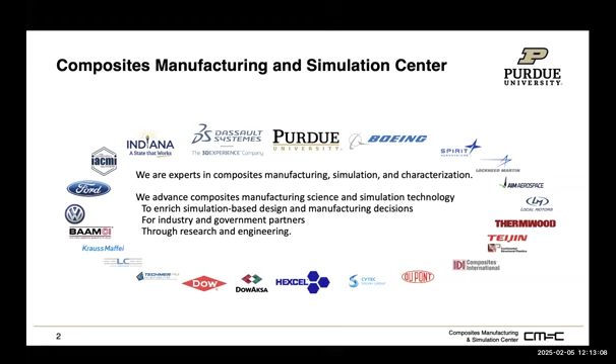Before I start, I also want to give a brief introduction to our Composites Manufacturing Simulation Center. I'm employed by Aerospace at Purdue, but also affiliated with the Composites Manufacturing Simulation Center. The center was established around 2016 with support from IACMI, to develop industrial collaboration with supply chains and OEMs to advance manufacturing simulation for composites.

Over the years, we've developed partnerships with a variety of different industry companies, including Dassault Systèmes through their 3D Experience Education Center of Excellence in Advanced Composites. We leverage the advantage of getting full access to the software, and we also have a partnership with Thermwood to develop larger scale additive manufacturing.

So you can see the movie at the corner. That's not really 100% my research, but we share the facility and develop lots of interesting collaboration work over the years, working on high rate composite manufacturing and practicing model-based engineering.

We also have a very interesting platform. As you can see in the middle photo with the cloud, that's the cdmHUB - a cloud-based infrastructure allowing researchers and educators to share teaching resources, research resources, and most importantly, simulation codes for the entire community.

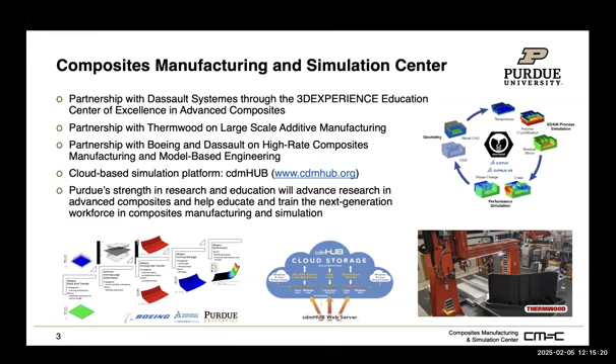If you are doing nano research, you're probably familiar with the nanoHUB. The CDM Hub is particular for composite manufacturing simulation. If you'd like to know more about composites or get more teaching resources, you can go to the CDM Hub. The goal is you can publish your codes, and people can run them on the cloud without installing locally. There are lots of interesting resources on the CDM Hub if you're interested.

With the center focusing on composites manufacturing, we also have a variety of facilities available to support it, including the autoclave, the press for compression molding, machines for materials characterization and mechanical testing, and a laser scanner to measure part dimensions after the manufacturing cycle. You'll see some applications of this equipment supporting simulation work.

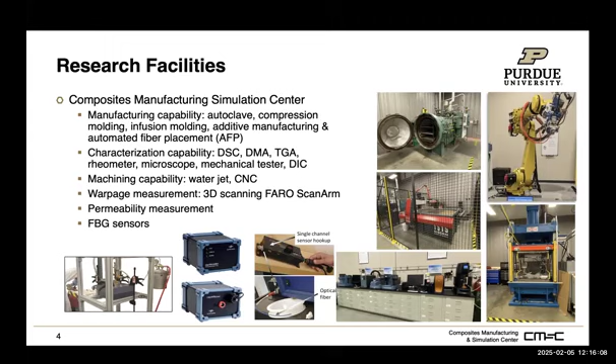Since most of you probably aren't familiar with composites, you've probably heard the name - this is a material widely used in aerospace structures because of the weight savings they provide. The general idea behind composites is combining multiple materials to maximize the benefits of each.

The composites I've been working on are a combination of reinforcement and binding. In particular, most of my research nowadays uses carbon fibers because they're very strong and stiff. But one drawback of simply using carbon fibers - and carbon fibers have never been a structural material by itself - is that it's very brittle, and also difficult to handle because it's like hair, very small.

So to make it a structural component, you also need a binding polymer, which we call resin, to bind the reinforcement. With this, we hope to get one integrated part with the stiffness and strength we want, and also better damage tolerance, because the resin system has larger strain to failure, so it's more ductile. Mainly we want to add ductility to the carbon fiber reinforcement to create a composite.

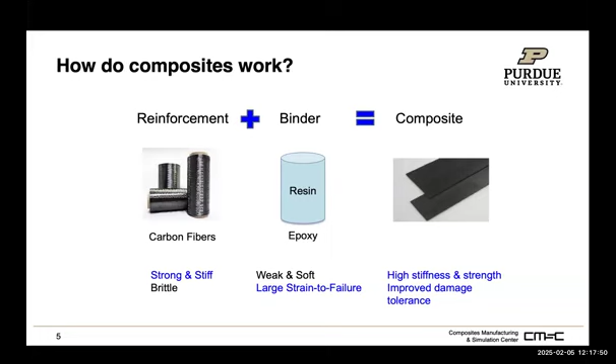There are a variety of manufacturing processes to make composite parts. We'll start with liquid composite molding, since this is the process I've focused on for a while. Later in this talk, you'll also see advanced automated fiber placement, which uses robots to make composite parts.

Starting with liquid composite molding - this process is suitable for either high rate, low cost manufacturing, or for parts with pretty complex geometry. It usually starts by laying down the mold. The mold isn't necessarily flat; it can have any contour needed for the geometry of the part you want to manufacture.

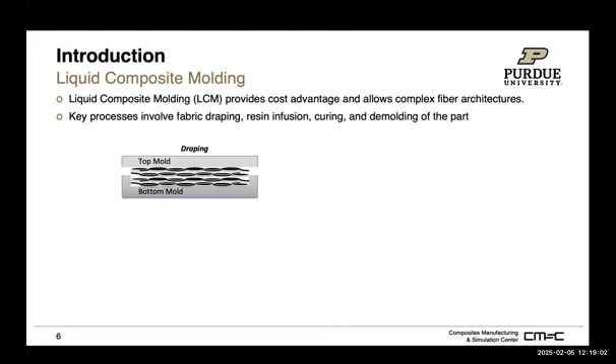Then you lay down what we call the reinforcement - the fiber preforms - over the mold. Then we need to close the mold. The first process is just draping those dry fibers over the mold, which we call the draping process. After that, we provide compaction to compress the mold, and then do a resin infusion process.

During that process, the binder - the polymer - is infused into the dry preform.

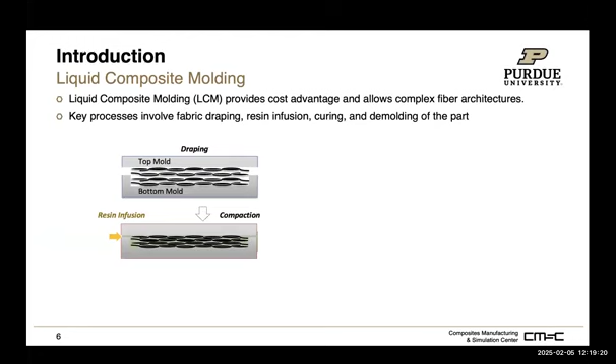And after that, you need what we call a curing process, because this is usually for the thermoset. So we apply a curing cycle. This is just like when you're dealing with your epoxy, right, for any repair project you are working on.

Some of the adhesives also require a temperature cycle for the curing. So we will need to apply the temperature, and once we allow the resin to be fully cured, then we reduce the temperature and do a demolding process. So from that, we expect to get a fully consolidated and cured part for the composite.

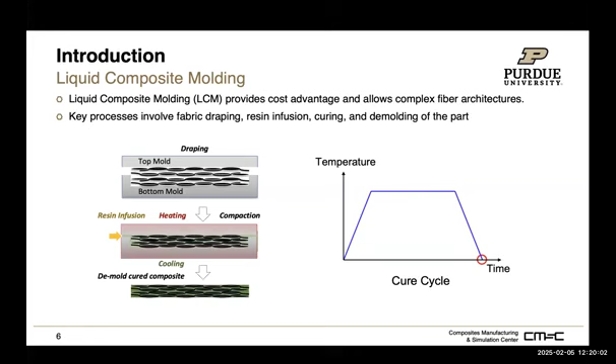So because of this manufacturing process, beyond just seeing the advantage of using composites, we also see the defects. Those defects can come from the infusion process where you can see dry spots, which means the resin or polymer never reached that area. So there can be something wrong with the infusion process.

There are cases when we do the forming of those dry fibers where wrinkles can occur, especially when the geometry of the mold is very complex. And there are also cases where, maybe not very significant, but if you zoom in you can probably see from the screen that there are actually also cracks developed.

Those cracks are not because you apply mechanical loading to break the part. It's because the curing process generates lots of heat, and that heat can introduce large enough residual stress that eventually develops micro cracking in the polymer.

So at the structure level, we also see the dimensional change, which is very significant for manufacturers, especially for material being used in aerospace applications, which requires very tight control on dimensional stability. There are cases where, because of material anisotropy, we expect to see warpage in the part if we try to stack two different orientations of the fibers.

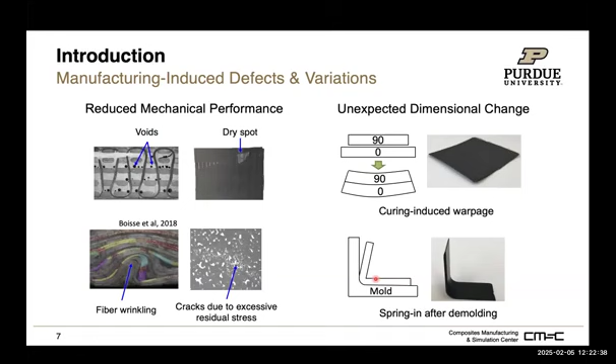So the enclosed angle will actually decrease. It was always around between 1 to 2 degrees spring angle. So the question is, can we really predict, or what really causes this spring angle, so that we can do the mold compensation and get exactly a 90-degree bracket?

So this all comes down to the question: can we have a numerical simulation to guide us for the manufacturing process, with the hope that we can develop digital twins for composites manufacturing? So this is the kind of work I have been working on in the past several years, looking at this liquid composite molding process, trying to have individual components simulated, and also to explore the physics behind it.

So it all starts from the fiber draping, where we want to have the reinforcement follow a certain geometry depending on the part you are looking for. Then there is also exploration about how we do the infusion process. What caused the defects? Can the simulation allow us to understand that if we do this, you do expect to see some of the defects in the part during the infusion process?

And then once the infusion process is finished, there will be a thermomechanical analysis, allowing us to understand how the residual stress will be developed, and eventually how that affects your final dimension, and how that links towards the strength prediction. Because at the end of the day, we really wish to know the performance of the part while understanding the manufacturing process.

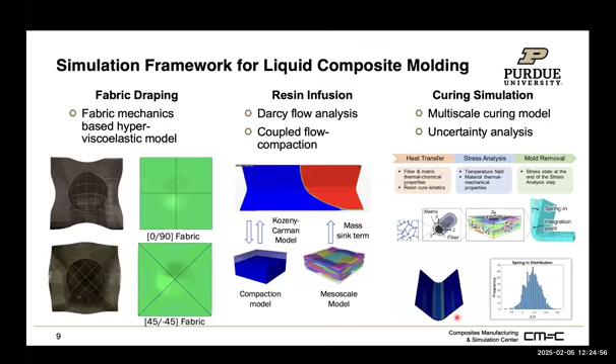So we break this down into an individual physics-based approach to understand how to simulate the draping, what is the fundamental mechanics behind this draping simulation, then the infusion process, and also the curing process. So we have each individual simulation framework developed based on the physics behind each manufacturing step, eventually linking towards how AI and machine learning will help us move towards the digital twin for composite simulation.

So we'll provide a very quick discussion about each individual process, and you will see how eventually everything is assembled together. I know there are very few audience members working on mechanics.

When we're looking at the fiber draping process, this is essentially a process that's really focusing on the mechanics itself, especially since the draping process involves fairly large deformation of the fabric.

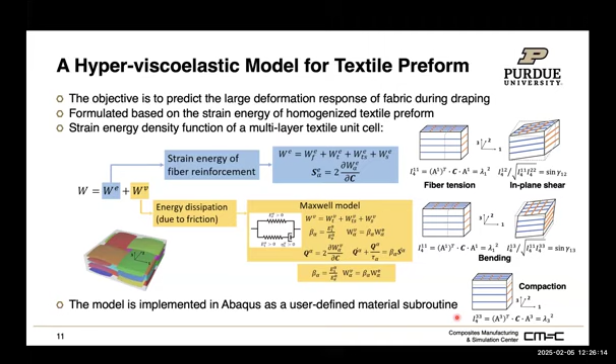With that in mind, one of my students has been working on a physics-based hyperviscoelastic simulation framework to capture what happens when you place the fabric over your mold, to efficiently predict the fiber orientation. This is some of the work we've done to have a very robust fabric model to predict fiber orientation during the draping process, through the hyperviscoelasticity modeling framework.

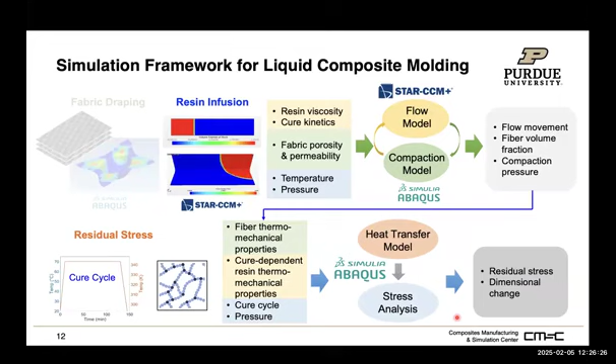Once we know how the fiber draping process works, we also need to see if there are ways to pass that information to the infusion and curing stages. Over the years, we've worked with a small company, Global Engineering Materials, to develop a smoother integration of the infusion and curing simulations.

For each individual infusion simulation, we need to incorporate the architecture of the textile and the flow compaction phenomenon, leveraging an external database so we can pass information from the infusion, carried out by CFD simulations, to the FEA simulation for residual stress analysis on the part, allowing us to predict dimensional change and stress distribution at the end of the manufacturing cycle.

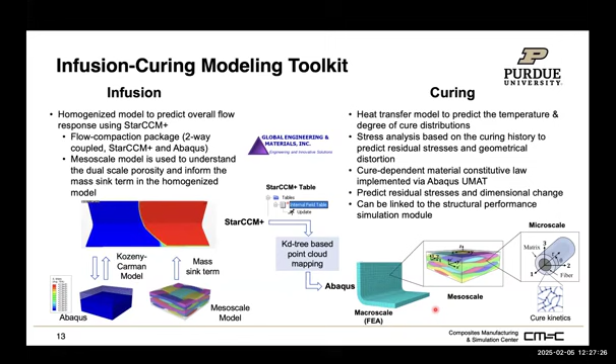Some interesting work we've been doing starts with validation. We still use a fairly engineering approach by homogenizing the entire infusion process based on Darcy's law, treating the preform as a porous media to see how the flow passes through.

On the experimental side, we need some experiments to characterize the permeability of the fabric for our simulation work.

We also run benchmark studies, trying to simulate cases like an L-bracket, or the one shown in the middle, the simulation flow for a doubly curved mold, or infusion for a semi-hemisphere shape, like a dome shape.

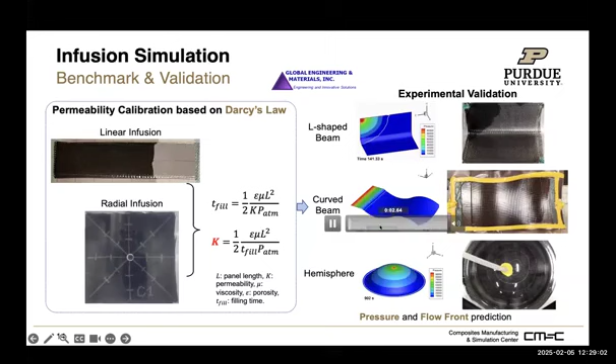Once we validate those simulations using results from the fabric characterization, the next step is to further explore. Looking at the entire simulation workflow, we're really focusing on the integration.

One thing we realized is we see so many defects during our infusion, even in a simple L bracket shape. You'd feel it's easy—you put resin in on one end and suck it out on the other end. We expect a very smooth behavior, as indicated in the original simulation, where the white line shows the movement of the resin flow front.

But unfortunately, this isn't really what we observe most of the time in the lab. If you watch this more closely and compare it with the ideal simulation case, the main difference is we see acceleration of the resin flow front at the corner. This is pretty common—we've seen it multiple times.

Going back to our simulation, we realized simply assuming porous media with some permeability to simulate the resin flow front isn't sufficient. One phenomenon behind this is the compaction force, which will also affect the permeability.

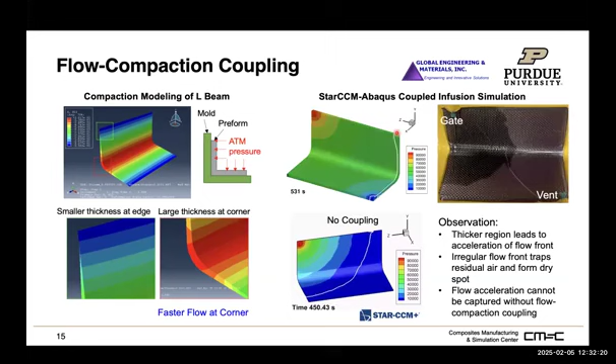This is also something we observe in the simulation, that if we get accelerated flow because the compaction force is small at the corner, it increases the permeability. The resin gets accelerated, and with those L brackets, it can create a dry spot on one of the flanges.

Once we have the capability to simulate the resin flow, the next step is we also need to look towards the curing process. This is also more tricky because it combines the chemical reaction with the heat transfer phenomenon, and eventually we have to capture all the key mechanics associated with this process to know what's going on.

So there are two key elements. One is we need to know, for this material which is a thermoset polymer, what is the chemical reaction during curing and how the polymer behaves. The next question is, we also have reinforcement, so we need ways to do homogenization to account for the microstructure effects and architecture effects of the reinforcement.

On the heat transfer perspective, we know the curing process is an exothermic process. You will expect, if you wait for your adhesive or super glue to cure, you feel the part become warmer, because heat is generated during the curing process. That heat generation is characterized using cure kinetics, which we can measure in the lab using a device.

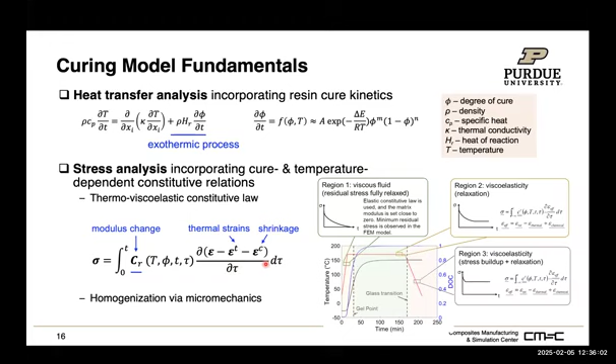Also, as I mentioned earlier, there's the reinforcement - how we need to do the homogenization. There are ways to get more detail about how to actually incorporate all kinds of the phenomena I just described into this thermal viscoelastic framework.

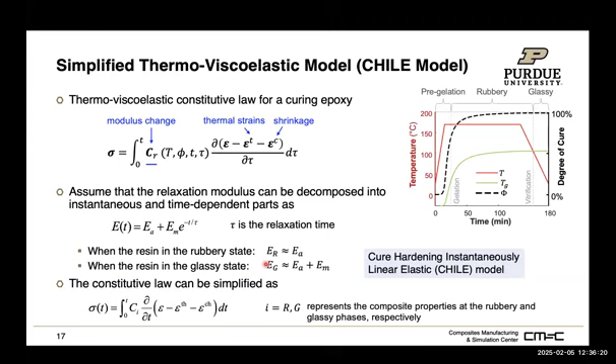Another thing we have to focus on is the homogenization, which is how you bring multiple length scales together. So this is the way we look at the micro scale, to look at the individual fiber-matrix scale to do the micro scale analysis. Then we also need something with the mesoscale simulation framework, and all the way towards the macro scale, which we need a way to homogenize at the end of the day for the structure analysis.

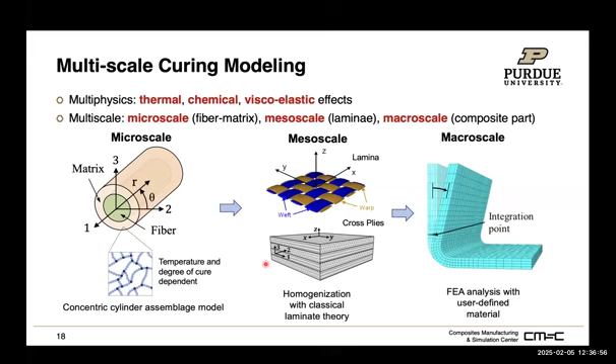And we also get a very efficient way to develop a thermal viscoelasticity framework. This requires some mechanics work, leveraging some existing models for viscoelasticity, but also adding the thermochemical part for the curing, and we have to account for the microstructure effects. So we have that framework in place so we can simulate the entire curing process.

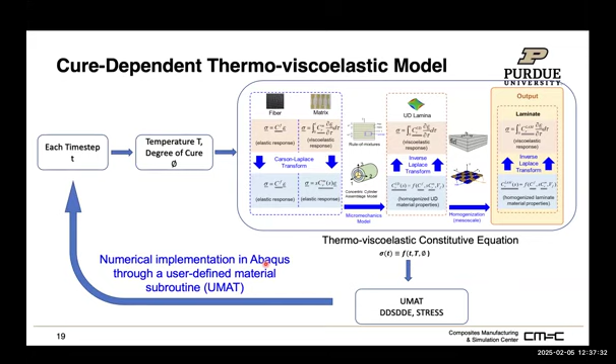So when we put this together, this is a pretty comprehensive model, as we're looking at how we have only the fiber and the matrix properties as inputs, with outputs towards how the part will deform and how the overall behavior of the structure will be.

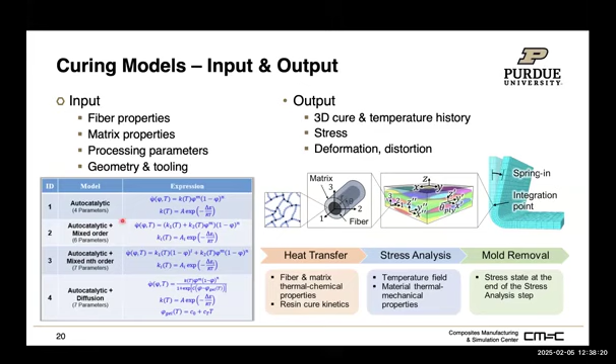So once we have this framework, one very interesting thing, since we have so many audience from industrial engineering, is this: now I have this physics-based approach with inputs being the material properties, your fiber property, your polymer properties with the processing-dependent properties, but we also have the processing parameters and the geometry of the tool and the parts.

Now we can put this together as optimization work, depending on what we really want to optimize and how we can actually tune around our manufacturing process.

Remember, as I mentioned, when doing this manufacturing process, one very critical step is curing. When we say cure cycle, it's basically a temperature cycle you apply to your part. So if we consider the red curve as the cure cycle we need to prescribe for the composite manufacturing, the question is: can we actually optimize this cycle based on the performance we want to improve?

Usually when working with composite manufacturing, you get a manufacturer-recommended cure cycle that is usually optimized for the material itself, but not necessarily for what you have in your part, for the real part you are working on.

So if we look at this whole framework, one question is: now we are building all the physics-based simulation in our FEA software. We use the commercial software Abaqus with user subroutines for the curing kinetics.

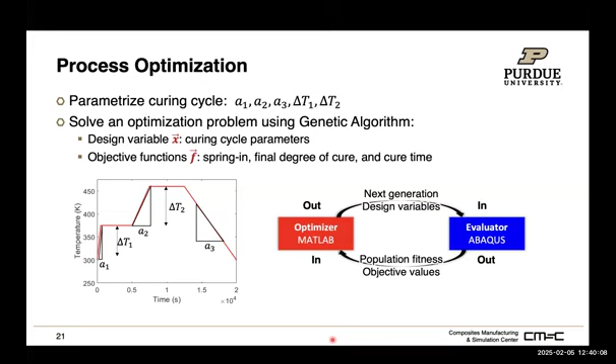Then we can link that with whatever optimizer we have. For now, we actually leverage the optimizer in MATLAB. You can use Python or whatever other language as well. So we are writing our optimization algorithm, leveraging existing optimization algorithms, but getting a way to link them to the physics-based simulation.

So this is one example, where one of the goals we are trying to achieve is to optimize this cure cycle by optimizing the heating rate.

This is a polymer that requires what we call two-stage heating: we ramp up to an intermediate temperature, hold for a time, then ramp up the temperature again and hold for another duration of time, then eventually cool down. So we can look at the different heating rates, the dwell time for each temperature we want to hold, and also the cooling rate.

With the goal in mind, remember the L-bracket example we've been talking about before, the goal is: is there any way we can tune around this cure cycle so that we can reduce the magnitude of the distortion by tuning the cure cycle?

But if you only have a single objective, it can turn your cure cycle into something unrealistic. So not just do we want to minimize the spring-in angle, at the same time we also want to minimize the processing time, but we also want to maximize the degree of cure to make sure the polymer is fully cured. Because if we don't have a holistic view of what we want the objective to be, it can reveal that yes, we reduced the spring-in angle and reduced the processing time, but the polymer is uncured.

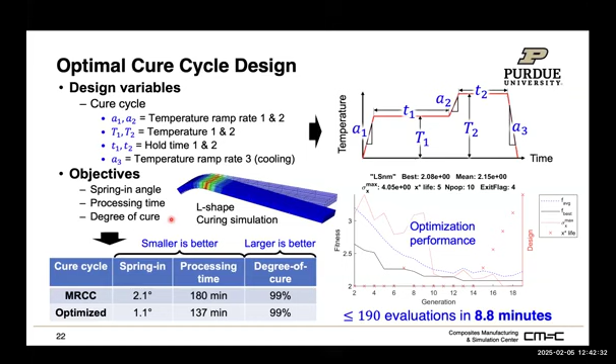Another thing we are looking into is uncertainty quantification. One challenge with composite manufacturing, and one reason industry pushes for modeling, is that the part doesn't always show the same spring-in angle. Your spring-in angle can vary day to day, from the people doing the manufacturing process, or due to polymer variations in the batch you receive, and that can all contribute towards the defects or variability observed at the end.

So this also relates to work we've been collaborating on with folks doing AI and machine learning, to see, hey, we're building this physics-based model. Can we efficiently predict the uncertainty propagation, or the uncertainty, in this manufacturing process? Especially here, we use the predicted spring-in angle as one measurement to see the variability.

We're also trying to answer another important question: where is this variability coming from? How do we go from the micro scale all the way to the structure level, and how does the uncertainty propagate? This relates to our collaboration with Professor Jiong Tang's group at the University of Connecticut to understand uncertainty propagation. We've collaborated on a variety of things, looking at different uncertainty propagation in the composite manufacturing process.

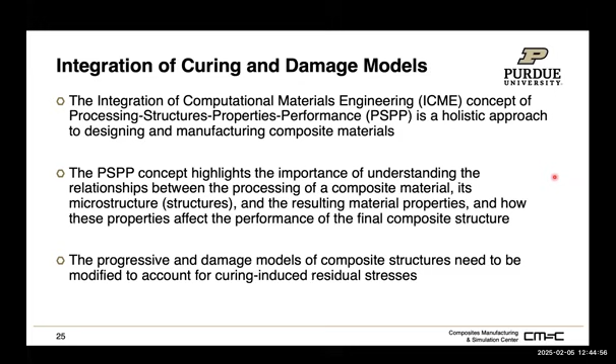Another goal of this physics-based simulation is, at the end of the day, to exercise it with the so-called ICME approach — the integration of computational materials engineering concepts — so that we can predict what we see in the manufacturing process and link that to structure prediction. That's also work we've been doing in this area.

Given my background, I got my PhD on progressive damage for composites, and I've been learning composite manufacturing since I was an assistant professor at UConn. I know some of you are near the end of your PhD and looking for jobs, maybe a faculty job. This is not the end — when you finish your PhD, it's not the end of your learning, it's probably just the start. I learned all these new things in composite manufacturing as an assistant professor, and I'm still learning. You'll later see some of our current work on more advanced composite manufacturing frameworks — I'm still learning nowadays.

One of the things we have to do is couple residual stress predictions and defects into progressive damage. We made lots of modifications to the progressive damage model, and now we have to incorporate residual stress, make sure convergence issues are solved, and ensure the residual stress and warpage are considered in the right way.

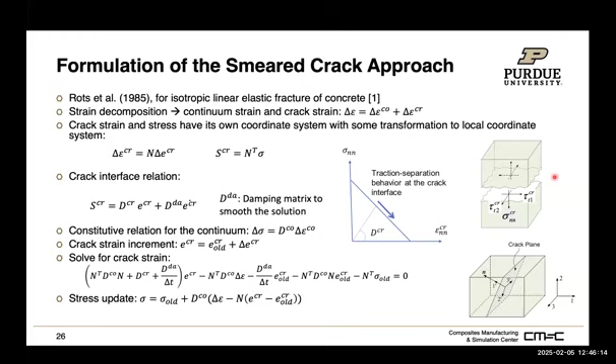So the question is, is it important to account for these manufacturing-induced defects? The short answer is yes. It's shown that there's a lot of value and importance in incorporating manufacturing-induced defects into the simulation workflow, which allows us to have a more realistic prediction and a better understanding of how manufacturing processes eventually cause residual stress and affect the performance of the part.

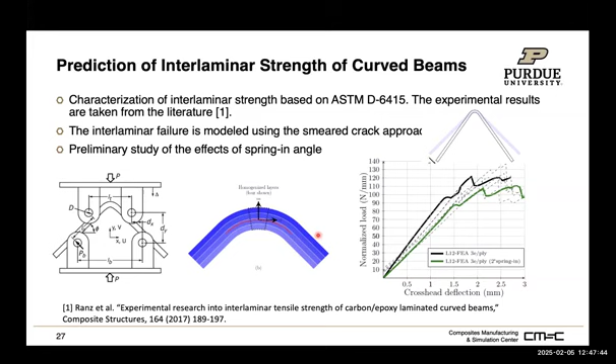So I think this whole holistic approach demonstrates this idea. This is also a smaller scale simulation — we look at the micro scale to see how residual stress develops, and eventually it drives failure at the micro scale, which also affects our prediction of the overall strength of the composite part.

It's important to do the physics-based simulations. This is the kind of work I've been working on for a while, but it's also very important to know if we can realistically measure some of the phenomena we capture in the simulation, but maybe not obvious from the naked eye. So we need some more advanced sensors to do the in-process, in-situ process monitoring.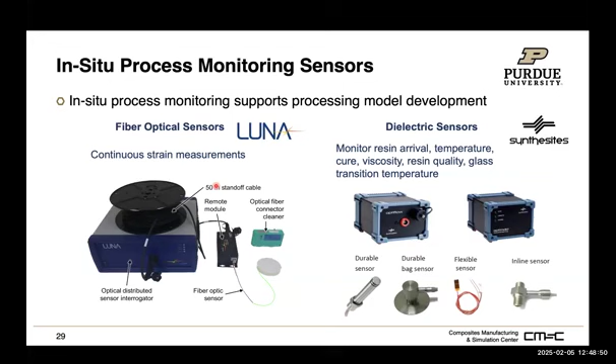Here we're particularly looking towards the fiber optical sensor and the dielectric sensors to do the process monitoring. If you're not familiar with the optical fiber sensor, it's just like a small hair that you can embed into your specimen. It's like a strain gauge, but small enough that it can penetrate into your part, creating some defects, but giving you measurements.

Something you'll observe here is this is actually what we call the pre-preg, which already has the polymer in your fiber, but we actually try to insert the optical fiber sensor transverse to the fiber, so we measure what we call the polymer-dominated behavior.

Something we observe from the optical fiber sensor is that there's indeed a shrinkage that occurs while we have constant temperature. As I mentioned earlier, when we have those models we've been talking about, you have chemical shrinkage because of cross-linking, and we indeed see that from the fiber optical sensor. Definitely you see the strain being developed because of cooling, that's more obvious, but the chemical reaction also can induce shrinkage as well.

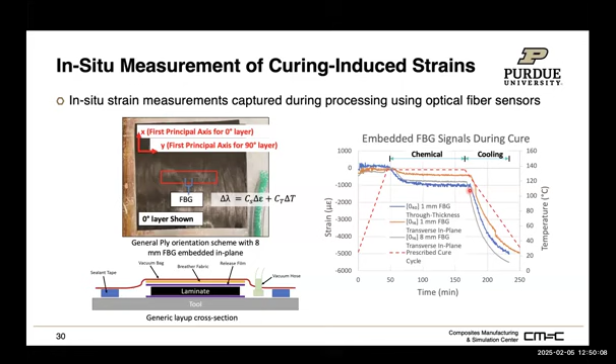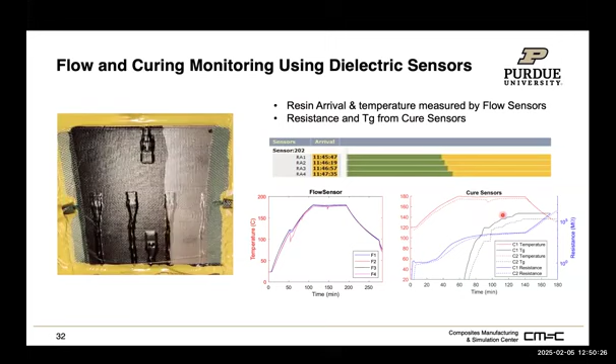We also have dielectric sensors that allow us to measure the flow front and the in-situ curing behavior. This becomes very neat as now we have sensor data we can collect in-process. Can we connect that sensor data to our physics-based approach, the physics simulation, to do real-time prediction? This is also some of the motivation for the digital twin - can we link the real-time data to the prediction?

So that gives us, now we've built all the foundation and are trying to move to this digital twin idea for composites manufacturing.

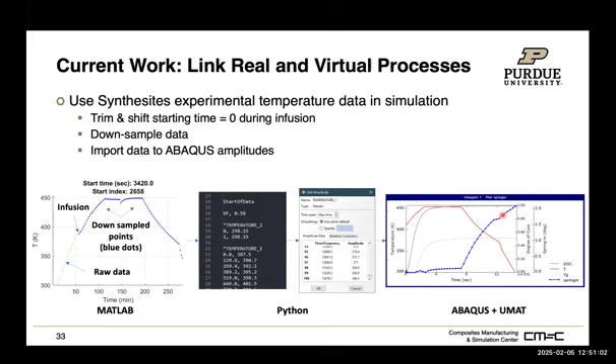With the last couple of minutes, I also want to quickly show the work on automated fiber placement. Lots of times you'll see the composite manufacturing process is pretty labor intensive. Now we have the robot to help, and one of the real benefits is even though composites have been developed and used for a while.

Being developed in the 50s and 60s, we see a lot of applications from the 80s, and now we've been seeing it used a lot nowadays. But if you look at the angle of the fibers being used, it's typically just 0, 90, plus or minus 45. Sometimes you'll see 30 or 60, but you never see any mystery angle, like 37 or 21 degrees, because from the manufacturing perspective, this is not something you can easily control.

So now with the robot, we actually can lay down the fiber precisely on the orientation you want. It's a very cool technology nowadays.

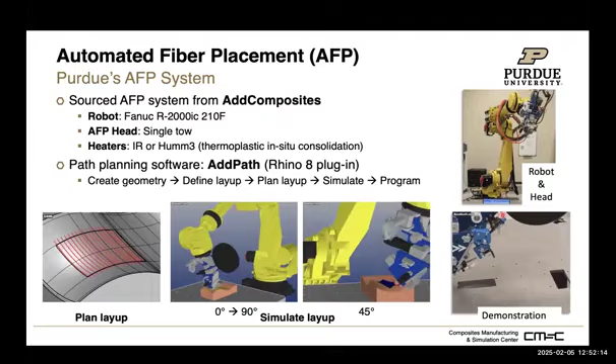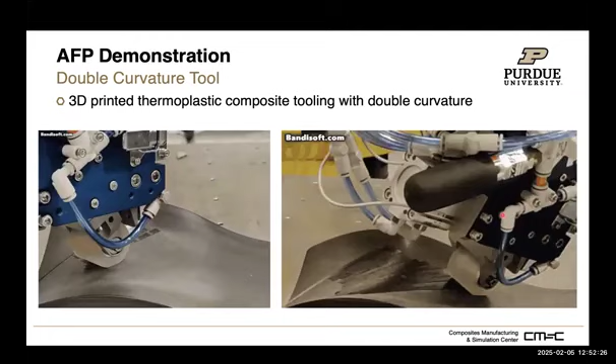This is also one example I'm showing as a demonstration - remember earlier in the presentation, this double curved mold? Actually, this mold is 3D printed, additive manufactured from the lab across our hallway. So we'll see how additive manufacturing makes the mold, and now we can lay down the continuous tape over the mold, which is very, very cool.

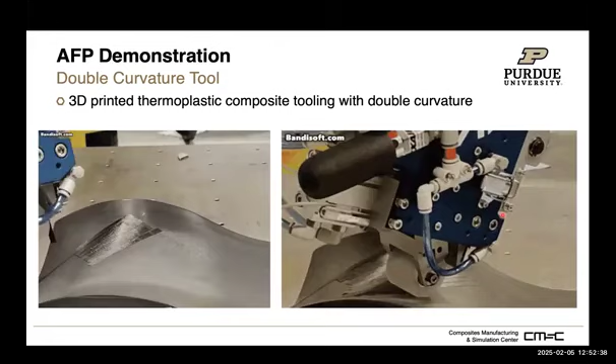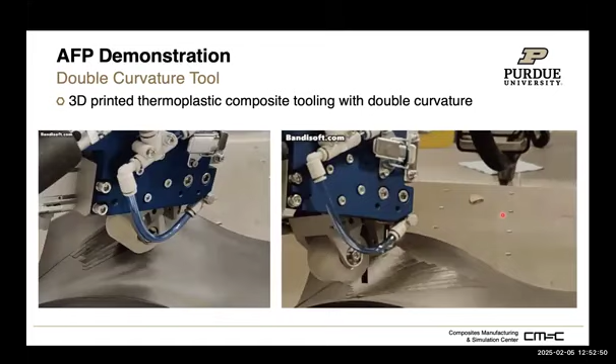With this technology, you can see this is the movement of the tape being wrapped over a double curved mold. This is also a very, very neat technology that we've been using.

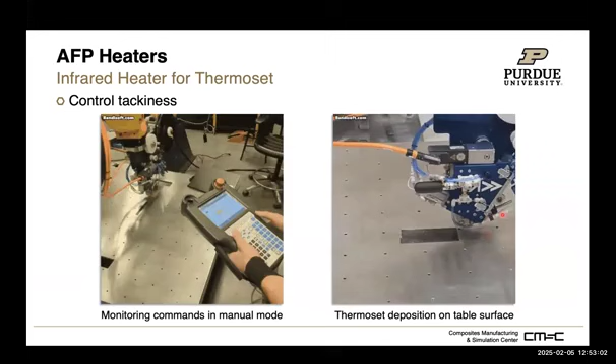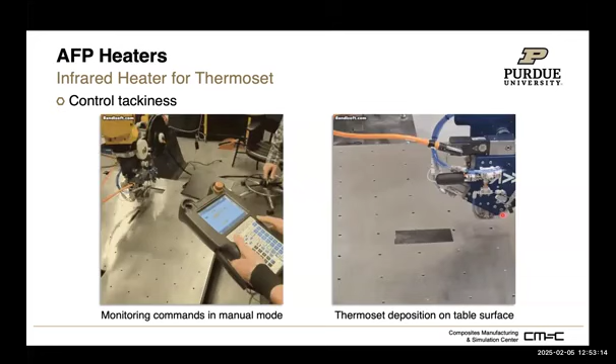One of the differences in this technology is because we need to establish some of the tackiness of the tape when we do the placement. So we've also been looking towards what would be the right heating, what can be used. Using the IR heater is pretty standard for this technology when working with thermoset.

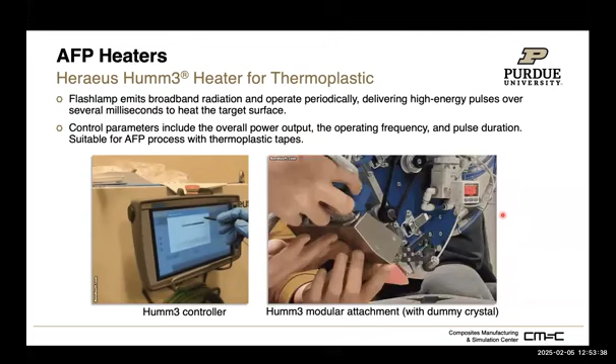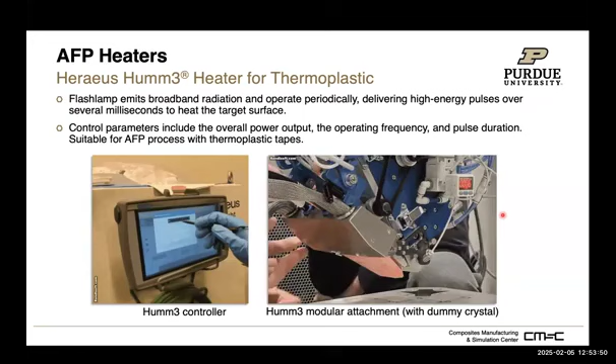But there's also a very cool heating device we're installing called the Heraeus Humm3. This is not like a laser, which needs lots of protections, and lots of times we hit roadblocks in the university facility trying to install a laser. So Humm3 is more of an intermediate heating power that is more powerful than the IR heater, but not as intense as a laser that needs all the protections. It's still a flashlamp with a heating capability.

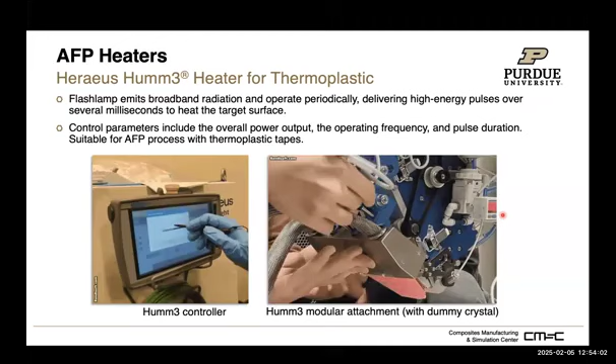There's still lots of machine parameters we're working on, but the very cool thing is this also allows us to do the placement of thermoplastic. If you think about thermoplastic, lots of plastic materials we use on a daily basis are thermoplastic, which means it's solid at room temperature, and once you reheat it, if you heat it beyond its melting point, you can reform it.

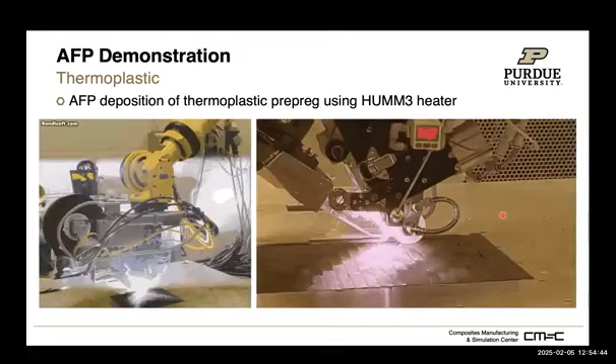In today's world of sustainability, we have been pushing a lot for thermoplastic materials and thermoplastic composites due to the capability for recycling. Thermoset composites still have lots of trouble with recycling, but thermoplastic composites have a way better capability to do the recycling. This Humm3 technology actually allows us to lay down those thermoplastic tapes using this technology.

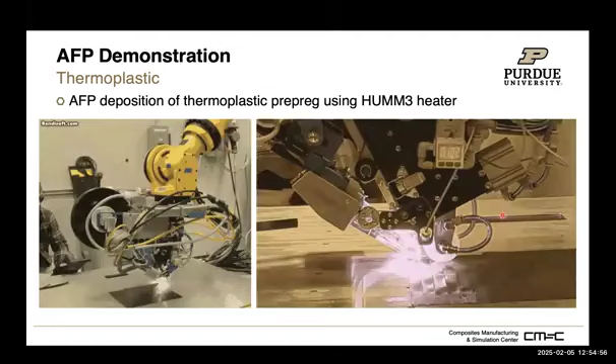So at the end of the day, we are still trying to build a simulation for this automated fiber placement, and there are also defects associated with that. It's a very cool technology, but even at the industrial scale, the TRL level is still rated pretty low. Even though the technology itself has been around for more than 10, probably close to 20 years, aerospace companies are still slowly moving to this technique just because of the TRL level.

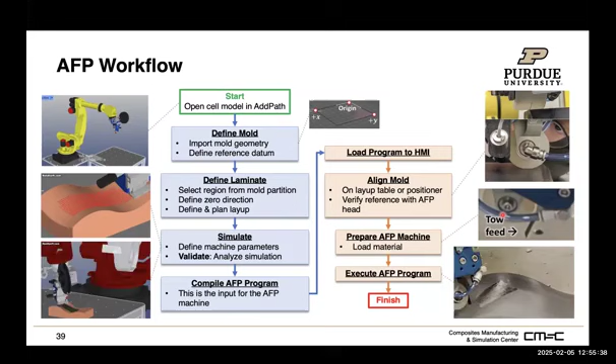If you've seen the robots being used for tape placement, you lay down the larger tape, not individual fiber tape. This is our ongoing work building the simulation capability for those tape placements. Again, it's not just the mechanics - it will be combined with heat transfer, the heating elements, all kinds of things into the simulation framework.

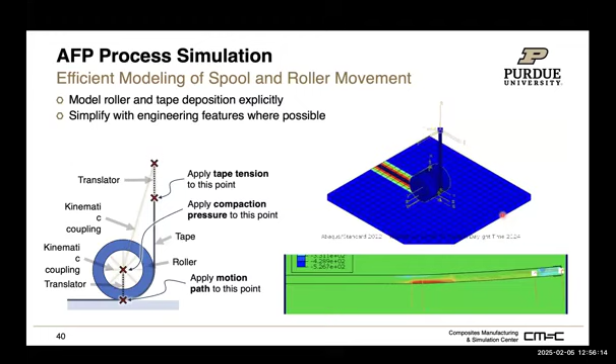One of the advantages of this highly controlled robot arm is that we also have more sensors that can be installed to do in-situ monitoring. At the end of the day, it follows a similar idea to what we built for the liquid composite molding simulation. This is also preliminary work, as wrinkling is the major concern in this technology. If we try to place the tow over a highly contoured surface, the tape will have wrinkles.

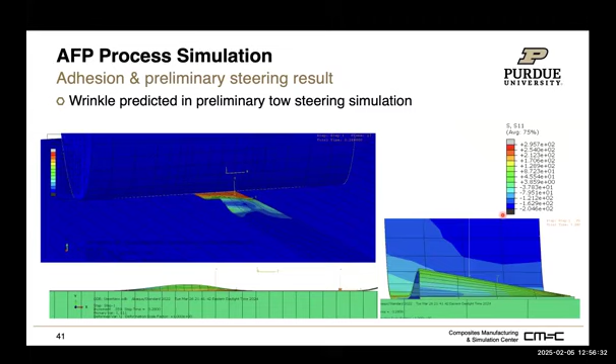So I think at the end of the day, what we are moving towards is building all these efforts together, learning a lot about robotics and how this machine will work. We want to connect physics-based simulation with data sensors, and nowadays with AI and machine learning tools, eventually to build digital twins for composite manufacturing, also moving towards a more sustainable approach. With the use of thermoplastic composites and robots in this system to reduce waste, we also make composite manufacturing more sustainable and more environmentally friendly.

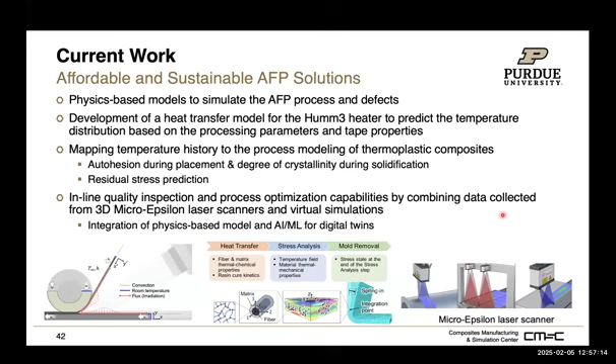So with that, I would like to take questions. I think I'm on time, right? You gave me 50 minutes.

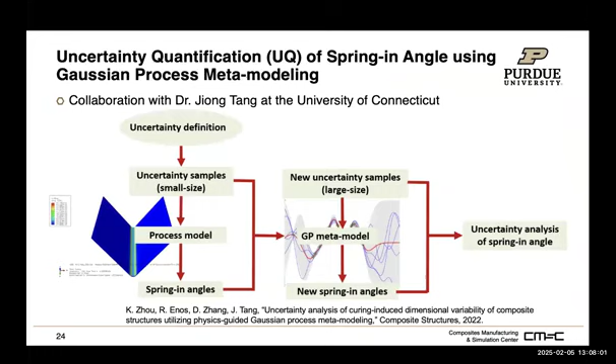We do sensitivity analysis for the uncertainty. We do uncertainty quantification to understand if there is variability of the materials. It's a Gaussian process model, so we vary all the material properties, say each material property can have certain variability, and also account for modeling uncertainty. This allows us to get a prediction of how the uncertainty propagates in the manufacturing.

We didn't incorporate uncertainty into the optimization framework, which I think is a very neat question you are asking, because I'm not really in design optimization - I may need to consult some experts in design optimization incorporating uncertainty. I learned that as a student, but just a textbook study about how to incorporate uncertainty into design optimization. I think this is a very interesting question, and we may need to think about incorporating that into the optimization framework.

Can you repeat your second question? Oh, thank you for the first question's answer. The second was, I wanted to ask if you could discuss any case studies where digital twins have improved manufacturing performance. That's a very interesting question.

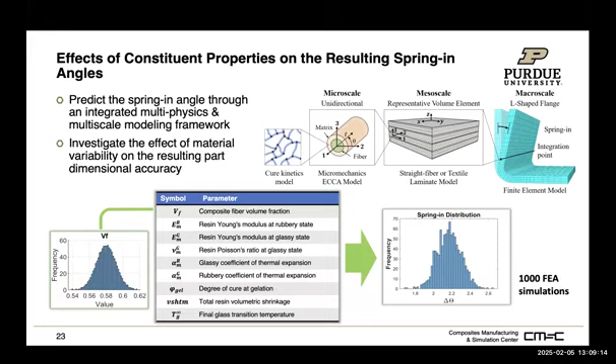If you look at the early slides, that's not typical of my work, but in general the work with my colleagues doing digital modeling - there's one very impressive work by my colleague, now Professor Barocio, and also Professor Pipes, who is our center director, working with Thermwood to do large scale additive manufacturing.

If you play around with a little printer, if you download a model online and then print, especially if you want to print a screw and a nut, most likely it won't fit. You'll see comments saying, 'I printed with this particular printer and it worked, if you print from a different printer it may not work.' It's the fact that during additive manufacturing...

It prints at a very high temperature, and it cools down, so it gets dimensional change. If it's a hobby it doesn't matter, you just resubmit a model - usually those printers are pretty cheap. But that's not the case if you are building larger tooling - the cost will be huge. So they demonstrated that using the simulation framework allows people to know the dimensional accuracy and helps improve the printing process for the mold.

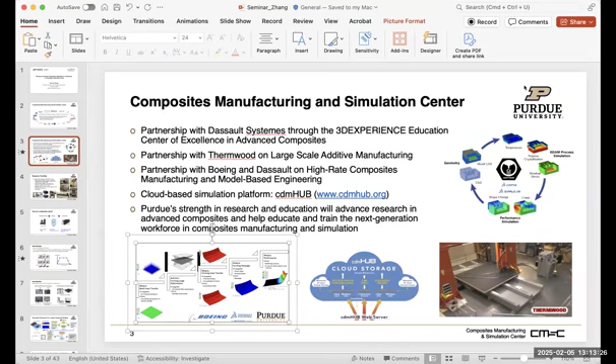Yeah, so I think we always want to try to build a digital world about everything nowadays. But the fact is, once you compare with the real experiment, what we see in the lab is always different. So something in my mind is this digital tool should give us a fairly early prediction about what's going on, or anything wrong, or something we should rework at an early stage. For example, when we are doing the infusion process, we have seen so many defects that can happen even with our small coupon, because you can imagine when the parts become longer and longer, the infusion itself will take a very long time. So if we can have a simulation, and at the same time also have sensor data—if the simulation can be very efficient, then once we look at the sensor data we can immediately predict what's going on, or something went wrong that we should stop or rework, or we can immediately predict what will happen in the future.

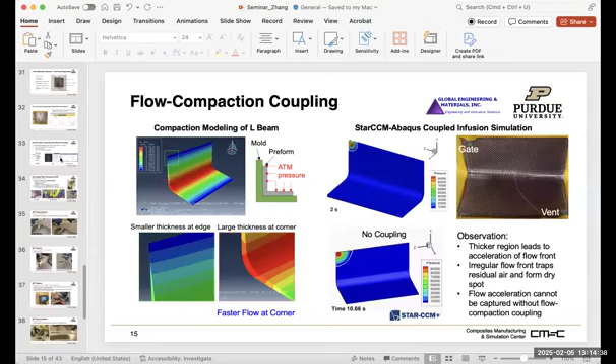So this is one thing we've been looking into, so that we can make those physics-based simulations more efficient using AI and machine learning tools. This is something we've been trying to figure out—how to incorporate physics-informed simulation into physics-informed machine learning models, to make it more efficient, so that when we are doing the manufacturing process and get sensor data immediately, we can predict if there's a leakage, a race tracking, a void, or dry spots, and we can do the rework or stop it at an early stage.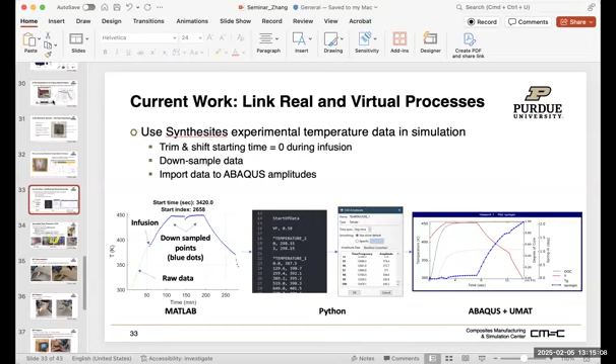And this is just the example of infusion—the curing happens at the same time. If we look at the data, for example measuring shrinkage from sensors at different crucial locations, we can quickly predict if the parts will deform into the shape we like, or if they start to deviate, and we can make some changes.

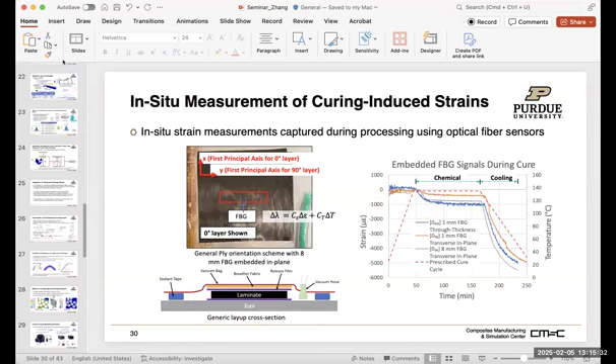And also the work with optimization is using the digital twin to mimic the true manufacturing process. We can make the whole—especially for composite manufacturing—if we use different geometry, different part geometry, different material, or different fiber orientation, we can actually design a manufacturing process that reduces defects and improves efficiency. So I think it penetrates multiple directions.

So what you're really looking for is simulation to help you predict behavior. Yes. Okay, thank you—because a digital twin has a different meaning to me. Right, I agree, I agree.